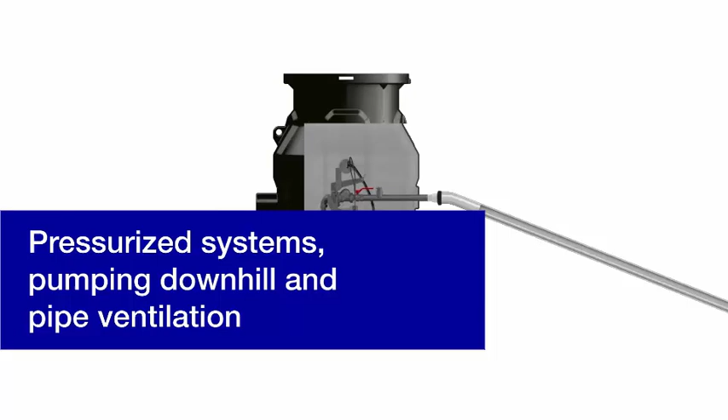In specific cases, Piranha pumps are also used when the static head between pump sump and discharge is zero or even negative. This is primarily because of its shredding system. The pump delivers sufficient pressure for overcoming the frictional losses of the pipework and probably priming a siphon. In this short animation, we will show the behaviour of the pipework and measures of ventilation and breaking vacuum.

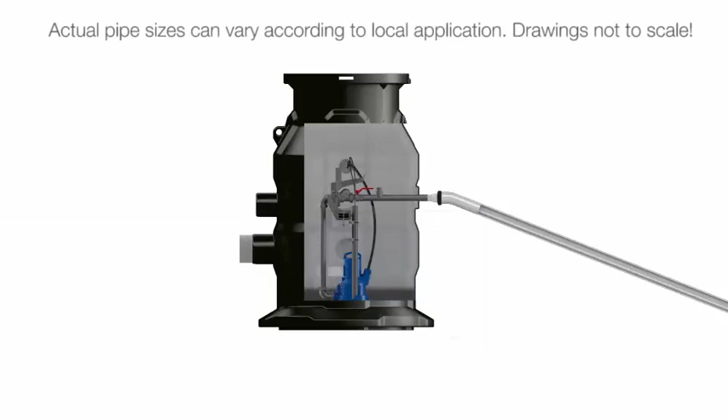In our first example, we will show the behaviour of an incorrect installation with no vacuum breaker. When the sump is filled up to the start level, the pump begins to operate against empty pipe. This means that the system curve has more or less no static head and also no frictional losses when the pump is starting. Further during operation, the static head gets negative by siphon effect, and the friction losses will increase as the pipe gets filled with water.

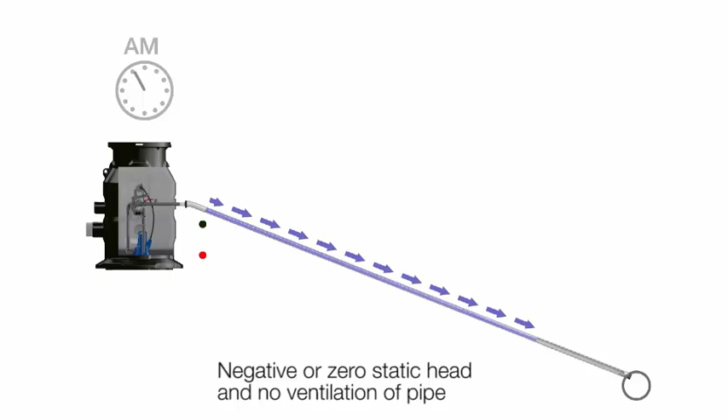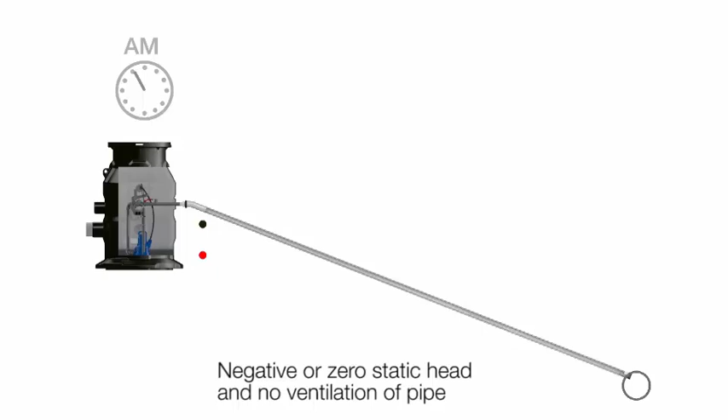When the pump stops, the water runs down the pipe and also empties the station pipework. Air is sucked in via the pump and an ugly and loud noise is created. It sounds a little bit like somebody sipping loudly coffee with a lot of air from the cup. Another effect is that the pump and the station pipe are falling dry, which may lead to restart problems. This effect is repeating with every stop of the pump.

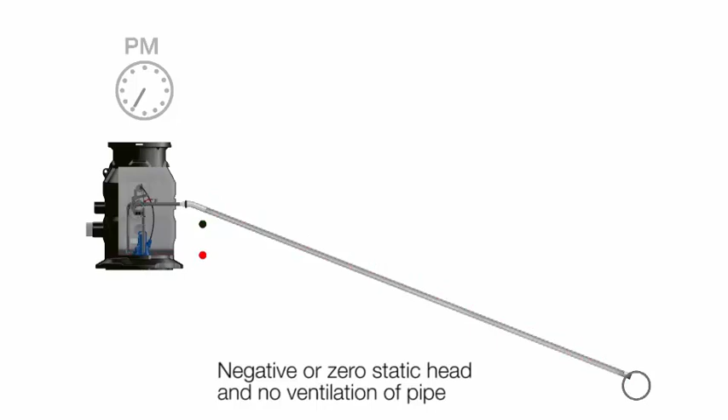The correct way is to install a vacuum breaking valve within the pumping station, which we will show next. Sulzer recommends a vacuum breaker if the static head is zero or negative.

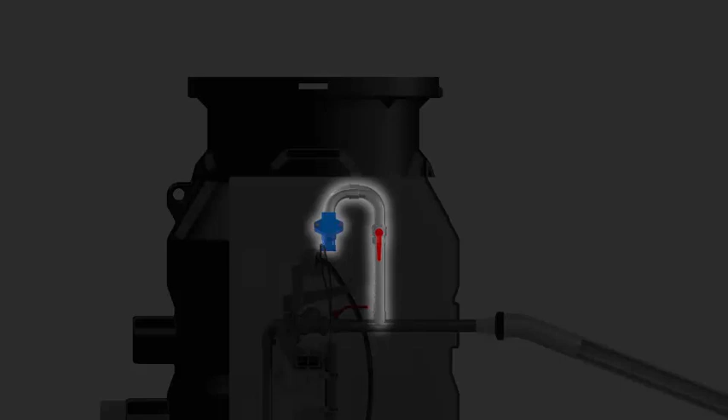The vacuum breaker is in principle a normal non-return valve which is mounted hanging from a pipe, connected via an isolating valve to the top of the station pipework. This valve arrangement is not releasing air, only letting air in.

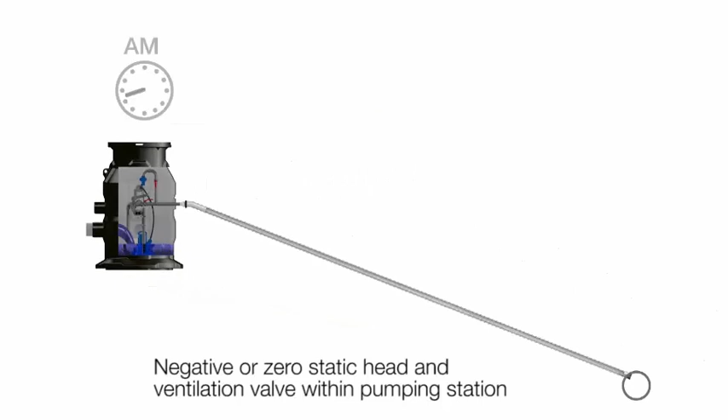The air is sucked in via a vacuum breaker without any ugly noise, and the station pipework always stays filled with water. The action is repeating every stop of the pump.

Please bear in mind for all examples of this animation that the realistic system curve has to be checked against the pump curve, and that probably an orifice plate at the Piranha discharge flange has to be mounted in order to avoid heavy cavitation.

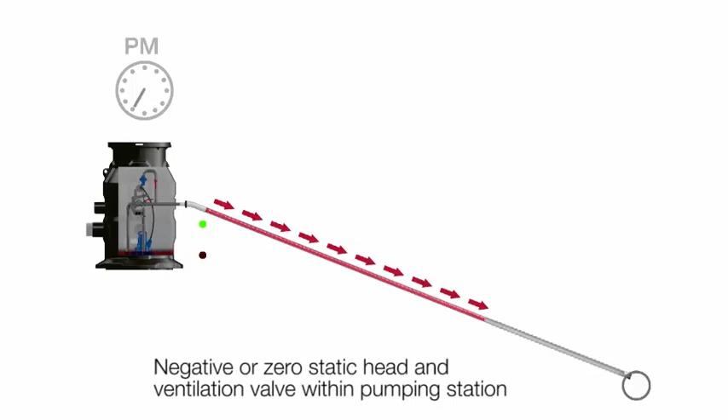Often these installations within negative or zero static head have one high point in between. In these cases, we also have to provide a vacuum breaker. When using a vacuum breaker in the pump sump, we may face different scenarios.

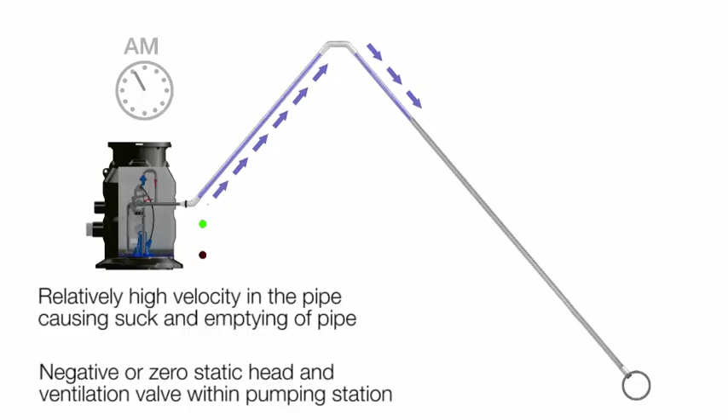In the first possible scenario, the velocity in the pipe when stopping the pump is so high that it is causing a draught, and the pipe is emptied by sucking all water over the high point. In this case, it is starting every time against more or less zero static head and zero frictional losses of the pipe.

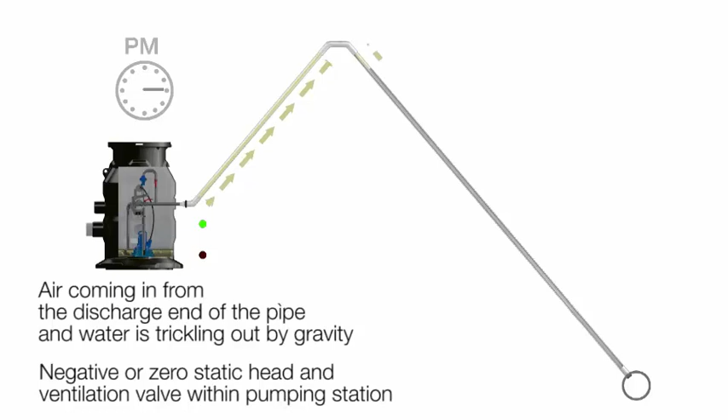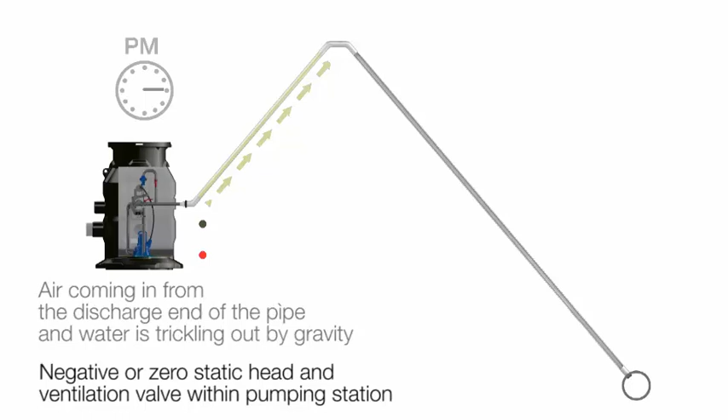In the second scenario, the water in the pipe comes to a standstill at the first moment when the pump stops. The water in the upward pipe is no longer moving. The water in the downward pipe flows slowly out as air is intruding from the end of the pipe. In this case, the system curve starts at every pump start with the static head from the level of the sump to the high point of the pipe, and with the frictional losses for this part of the pipe.

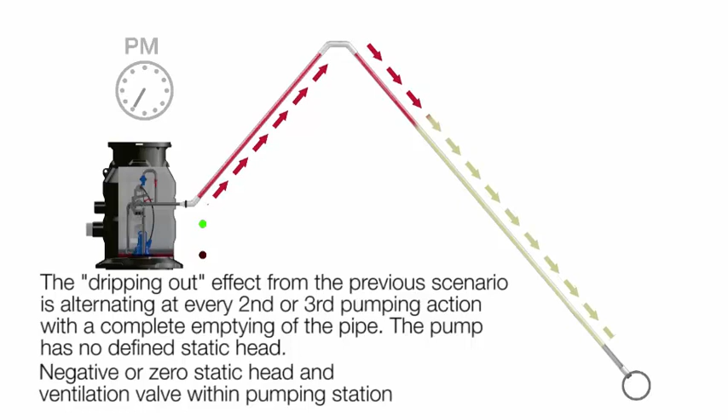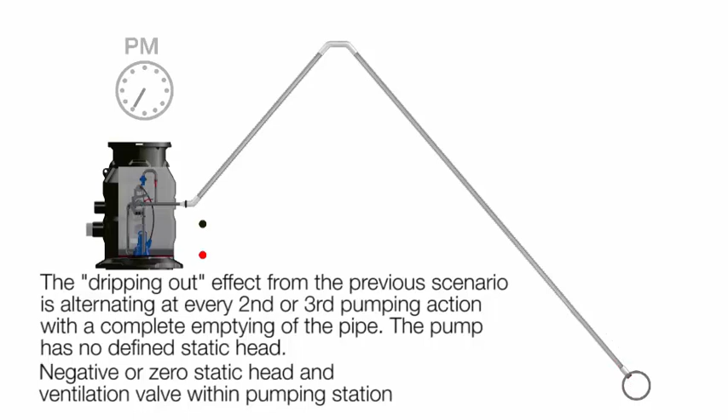Starting from the previous scenario, it is also possible that at the next pump start, the residual volume in the upward pipe and the new pumped volume are enough to create a bigger draught and empty the entire pipe from the pumping station to the gravity sewer completely. At the next start, the pump will experience a completely empty pipe, as in our first scenario. This explains why the pump may be alternating different performances and also different sucking in of air through the vacuum breaker.

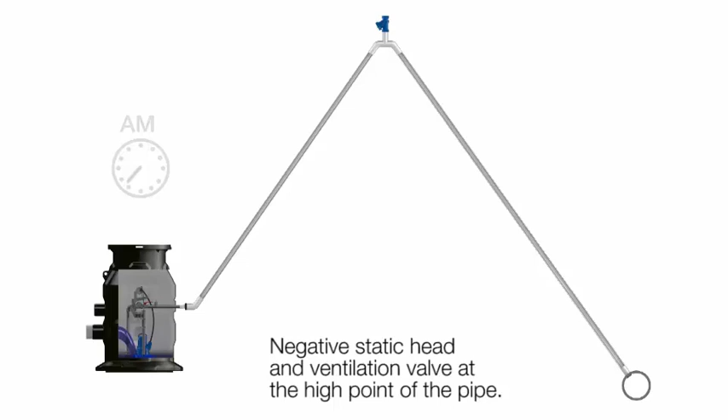Seen from a hydraulic perspective, a vacuum breaker at the high point of the pipe is the best solution, as this will provide at least a somewhat favourable system curve. However, we will find this solution rarely in the field, as a separate vacuum breaker or ventilation valve always needs additional investment for housing an inspection manhole, a defrosting heater, etc., and additional valves need separate maintenance.

Here we see the first filling of the pipe, the normal pumping operation, and the aeration breaking the vacuum.